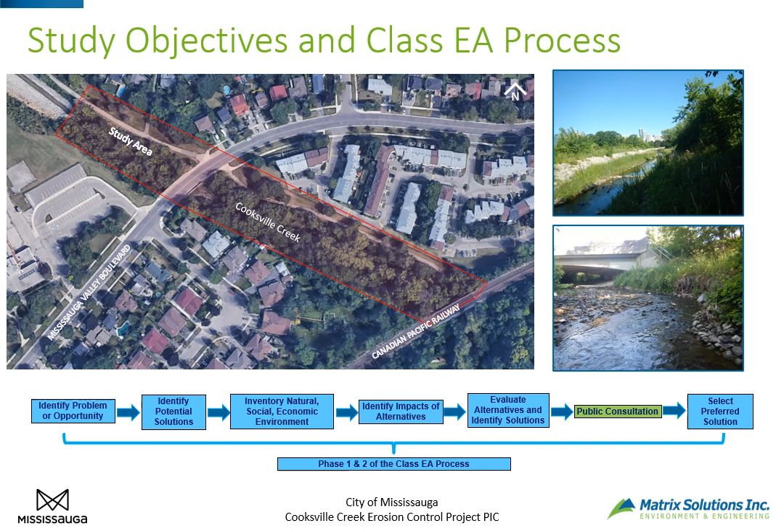Through the class environmental assessment process, multiple alternative solutions were developed and evaluated by the study team and will be refined through public and agency consultation. The study team will then select a preferred alternative and proceed with design of the recommended works. The study is being completed under Schedule B of the Municipal Class Environmental Assessment process. This portion of the study specifically addresses phases 1 and 2 of the environmental assessment process.

Rehabilitation objectives for the study area include providing long-term erosion protection that is compatible with the natural tendencies of the creek, maintaining or improving the hydraulic capacity of the creek, replacing the existing hardened creek bed and banks with more natural forms of erosion and grade control where feasible, providing environmental enhancements wherever possible, improving fish habitat and fish passage potential where feasible, minimizing environmental impacts during and post-construction, decreasing property and infrastructure loss, and minimizing capital and maintenance costs.

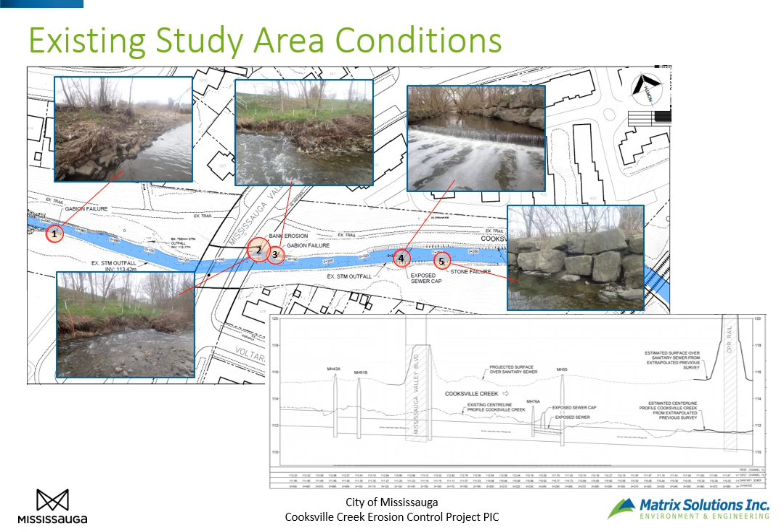Within the study area, Cooksville Creek is relatively straight and has a low slope. An operational walking trail is located along the east bank of the creek, linking Stonebrook Park to Richard Jones Park. Notable in the channel are 2 exposed concrete-encased sanitary sewer crossings and hard materials, consisting of gabion baskets and armor stone, along the east bank. In some locations, these bank treatments are in a degraded state and have eroded or failed.

The west bank and floodplain is naturalized between Mississauga Valley Boulevard and the Canadian Pacific Railway crossing. Upstream of Mississauga Valley Boulevard, the banks are lined with gabion. The channel bed includes deposits of gravel and areas of exposed clayey till material that is underlain by bedrock. The cross-section of the creek is generally sufficient to convey flows up to the bankfull flow event. The exception occurs in the middle of the study area, where these events spill onto the adjacent floodplain.

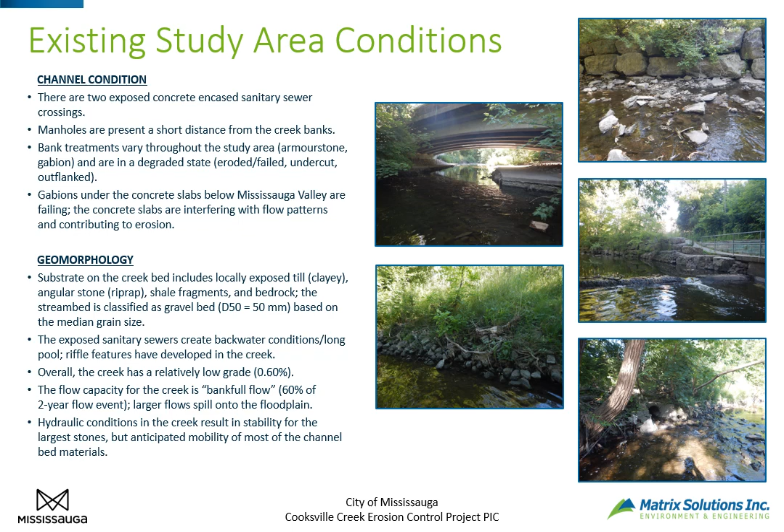Field investigations were completed during spring and summer of 2022 to review aquatic and wildlife habitat, inventory vegetation species, identify breeding birds in the area, and look for wildlife.

No species at risk flora species were identified during the field investigation. Through breeding bird surveys, the eastern wood pewee was identified. This is a species of concern.

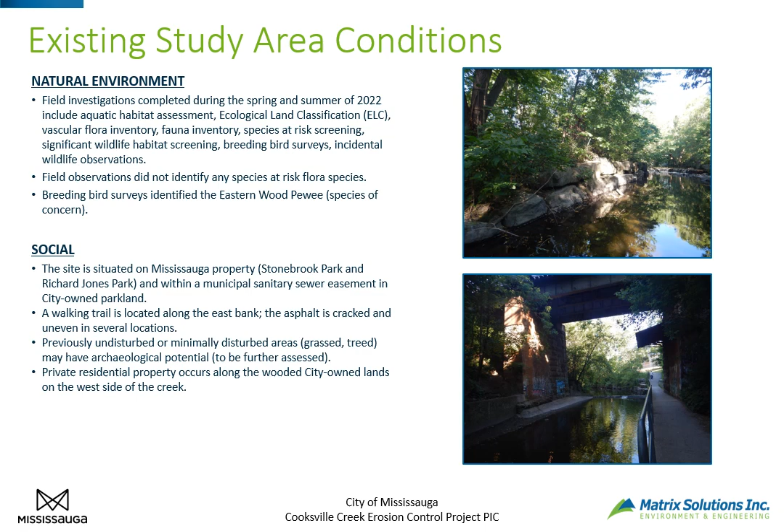The study area is situated entirely on City of Mississauga property and within a municipal sanitary sewer easement. Results of a Stage 1 archaeological assessment suggest that previous minimally disturbed areas may have archaeological potential. This will be assessed in the future if those areas may be impacted by the project.

In an environmental assessment study, alternatives are identified that have the potential to address the identified concerns and fulfill project objectives. For this study, 3 alternatives were identified. Alternative 1 is the do-nothing alternative. This alternative is always considered in an environmental assessment for comparative purposes.

In this scenario, no action would be taken to address the identified erosion issues, meaning a continuation of ongoing erosion and potential risk to private property and municipal infrastructure.

Alternative 2 focuses on undertaking repairs or replacing degraded bank erosion materials, such as corroded gabions, displaced boulders, and undercut armorstone. Measures to protect the exposed sanitary sewer and associated manholes would be incorporated into the study area, and local improvement to the channel would be undertaken so that bankfull flow could be contained within the cross-section along the entire length of the channel.

Alternative 3 considers an overall channel modification or realignment that would position the creek further from the east walking trail and incorporate naturalization measures between the new east bank of the creek and the trail. Measures to protect the exposed sanitary sewer and associated manholes would be incorporated into the study area.

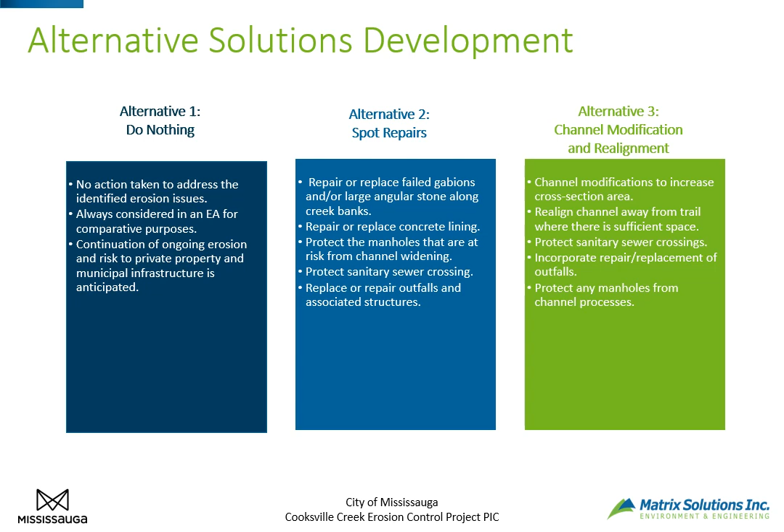In the do-nothing alternative, existing channel processes such as widening, incision, deposition, and planform development would continue. Failure of gabions, armorstone, and rock riprap bank treatments would continue to occur through hydraulic displacement, outflanking, corrosion, and undercutting. Portions of the trail would be at risk.

The sanitary sewer would remain unprotected, and risk to the manhole that is close to the channel bank would remain. Over time, channel widening would expose the manhole.

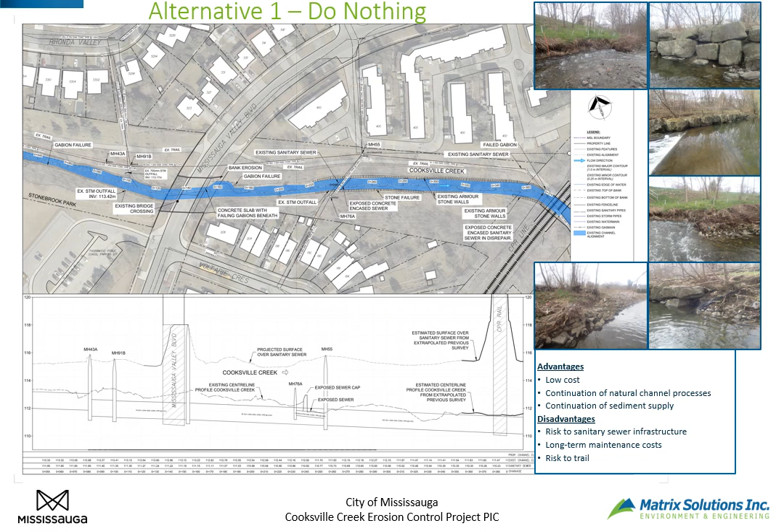For Alternative 2, local channel modifications would be undertaken to address failing bank treatments and manage hydraulic flow conditions. Where no risk to property or infrastructure exists, opportunities to naturalize channel banks would be explored instead of replacing bank treatments with hard materials. Opportunities to increase cross-sectional flow capacity would be determined to reduce hydraulic stresses and stream power on channel bed and bank materials.

Protection of the exposed sanitary sewer crossings would be undertaken, and where potential risks to infrastructure could occur in the future, for example, a manhole, measures would be implemented to provide future protection.

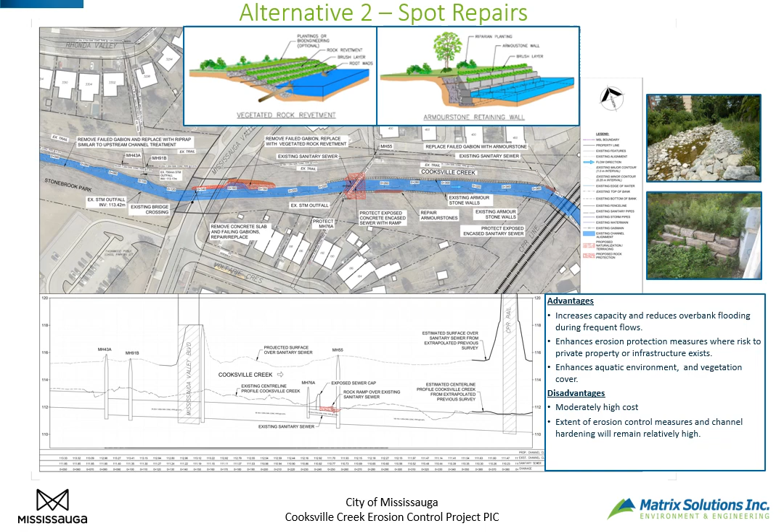For Alternative 3, channel modifications or realignment of Cooksville Creek would occur. All identified erosion issues or failing bank protection would be addressed by moving the creek away from the east bank. The cross-sectional configuration would be designed to accommodate bankfull flows throughout the study area.

Modification of the channel bed profile would be undertaken to conform with naturally occurring patterns of riffles and pools. Naturalization of the area would be undertaken to the extent feasible. Protection of sanitary infrastructure will be incorporated into the design.

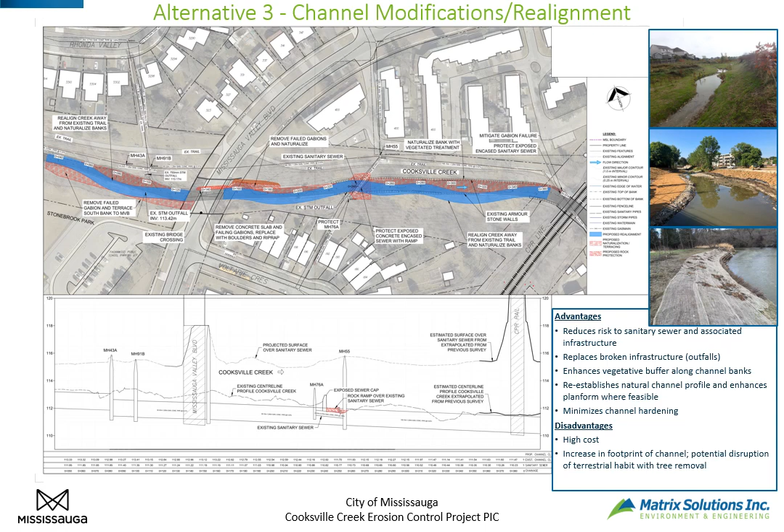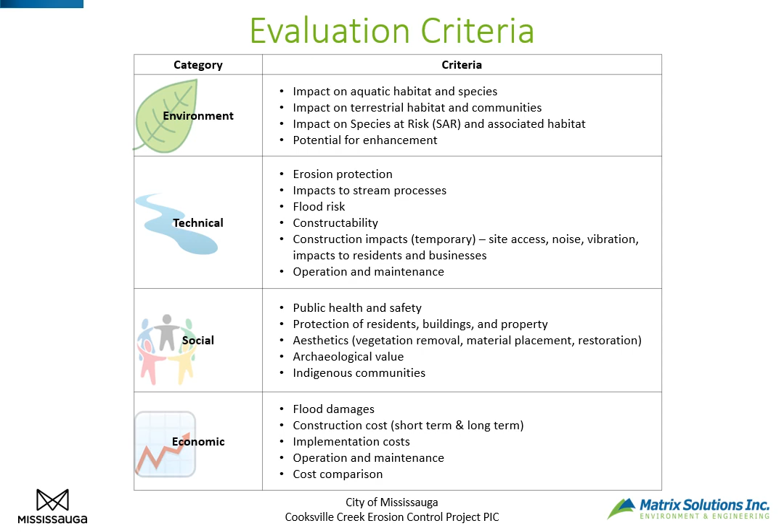As part of the environmental assessment process, each alternative will be evaluated using a common set of categories. Within each category, several criteria are used to assess how well the alternative provides a positive benefit toward achieving project objectives. A scoring is applied to each criteria, and the scores are added to determine the highest ranking alternative. This becomes the preferred alternative.

The next steps of the project include alternative evaluation and selection of the preferred alternative solution. This will be completed once any comments provided by the public are received. Once the preferred alternative solution is selected, the project report will be written. The report will present findings from all completed studies to establish understanding of existing conditions and environmental inventory results.

The project report will be available for public review and comment for a minimum of 30 days. Stay tuned to the City of Mississauga's website and local newspaper for the project's notice of completion for details on when and how to access the project report.